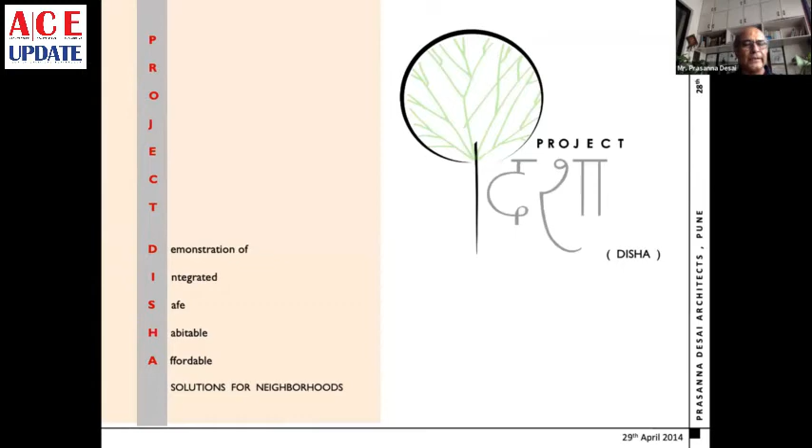Having said that, we run this project called Project Dasha, and Project Dasha to Disha. The Disha is demonstration of integrated, safe, habitable, affordable solutions for the neighborhoods, in which we are saying there's no point in scribbling all the time. We have been into it for the last two decades trying to say, let us show a demonstration. So this is the Dasha of your neighborhood, and this is the Disha, which is a 4-point approach: data collection, design, discuss - now this is very important - discuss, and then demonstrate.

So in a public realm, you have good street lighting, garbage management, trees, walking, cycling, and public transport - specifically buses and maybe smaller modes, not the big ones which are very cost consuming, like metro and all. Handicap friendly streets, vendors and kattas, and open spaces.

If we do this, it's very simple: property value will go up, safety will go up, health will go up, social interaction will go up, fuel pollution will go down, and fuel consumption will go down. And this will lead to the creation of healthy, hygienic, and habitable neighborhoods.

And the 11 number bus is our pet - it means walk and cycle, but both have to be safe cycling and safe walking. That is the prime criteria, because I will not cycle if I don't have safety. My elder son went to school on a bicycle, but the younger one did not go to school on a bicycle because the road was widened, the speed of vehicles increased, and it became risky in terms of meeting with accidents. So this is a component of a street as a public space.

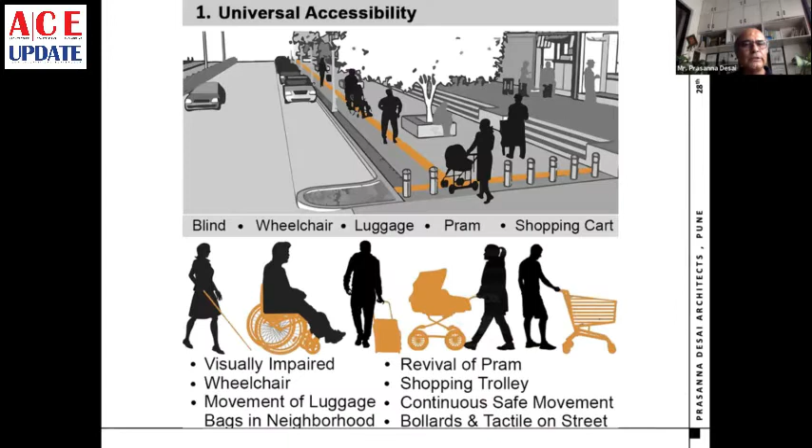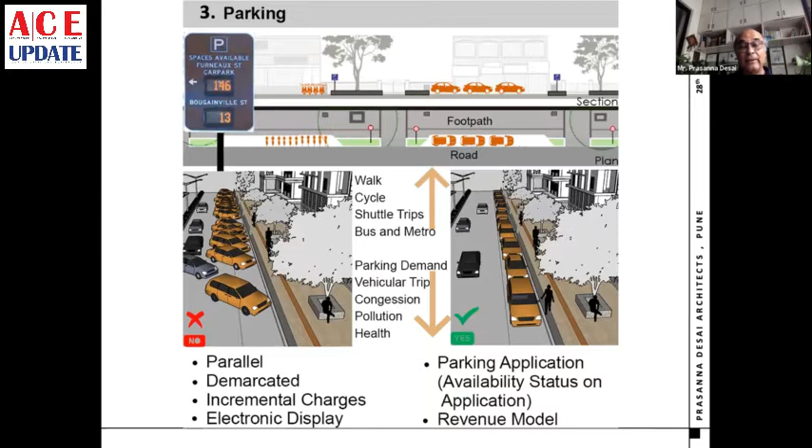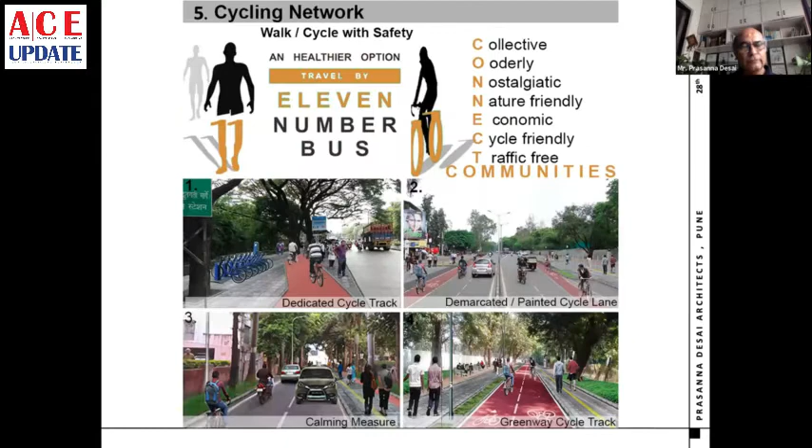The green is what we should have, the desired one, and the red is what we are currently doing. Having said that, the guiding principles for the public realm - we have six principles on which we work: universal accessibility, walkability, parking, paid parking if possible - which is very rare now and very lowly priced - hawkers and vendor spaces, which are also as per the Hawkers Act passed by Parliament, cycle network and walking network called the 11 number bus, and a neighborhood shuttle.

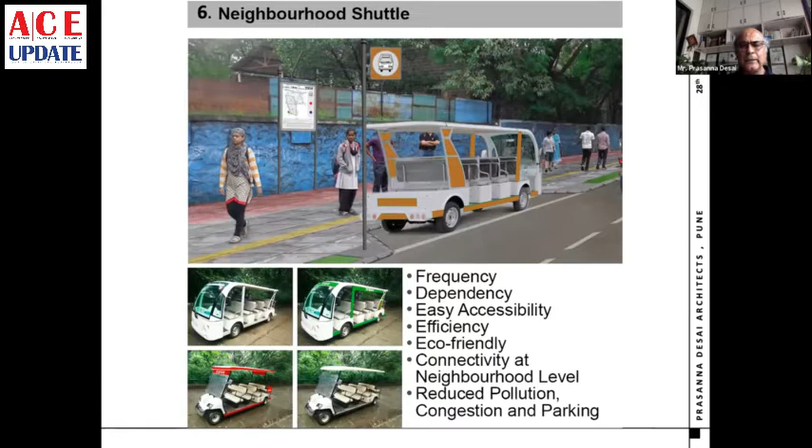So if you can have shuttles within the neighborhood which will take off 1 to 2 kilometers, somebody can just hop on hop off rather than take out cars, and I can maybe pick up 2 or 3 or 4 kilometers and have this hop on hop off within the neighborhood.

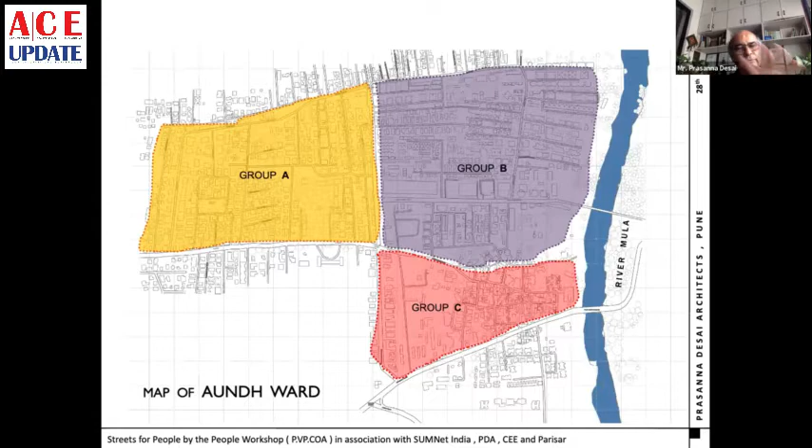The next stage was a workshop called Streets for People by the People, owned by the community. And this is all pre-smart city, because suddenly we talk about smart city as if nothing has been happening in cities for the last two or three decades. I think things have been happening at a smaller scale, but the smart city mission has certainly given impetus to it. Streets for People by the People was a workshop between PVP College of Architecture, where I teach, and SUMNet and NGOs like Parisar, the Center for Environment Education, and Aundh Vikas Mandal. We said that instead of one street, we will move to the larger neighborhood.

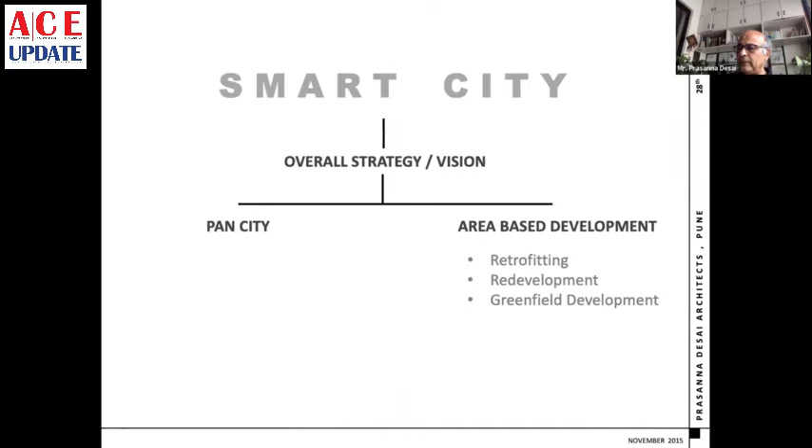Then we had three components: retrofit, redevelop, and greenfield. We went into the area of Aundh, where we said we will redo the street and the neighborhood with people, policy, and participation. There is a platform of Aundh, the smart city, and the last one is patience - you need patience for it.

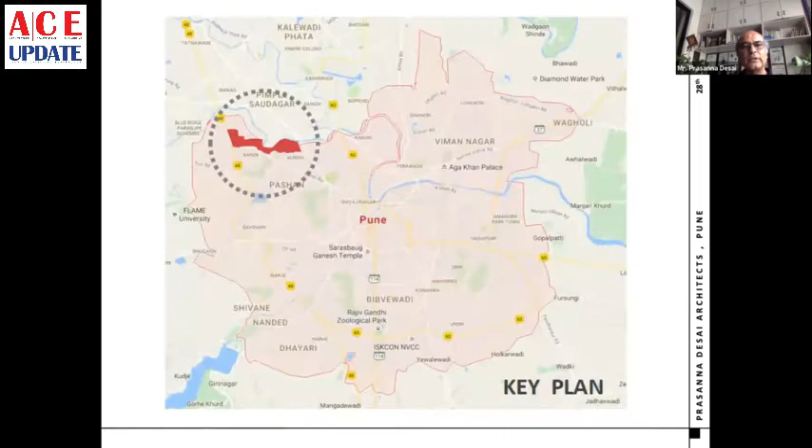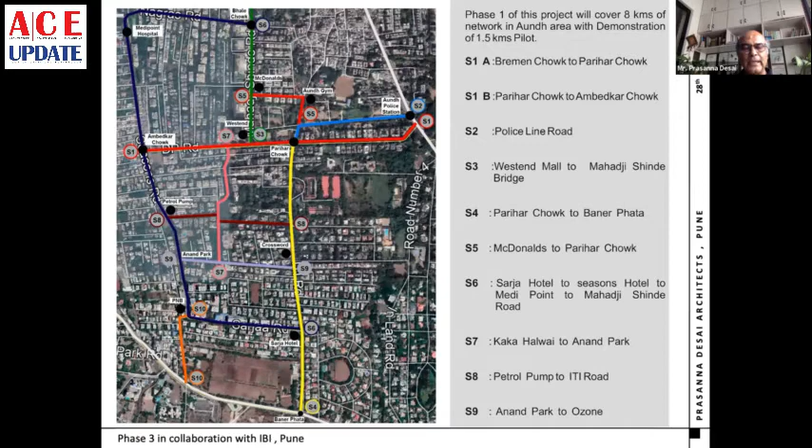This was the key plan, and we identified nine streets. These are the nine streets, and the red streets you see, the horizontal one on top, this is one - so this was S1 to S9, and I will quickly go through this.

These are the public discussions - the whole process I can't show, but there were large public discussions. We believe in people's participation. Before execution, the drawings were put up and people came in, and we had a lot of deliberations. Some people said good, some said bad, there were big arguments, but finally it came through. These are the discussions with the honorable MLA.

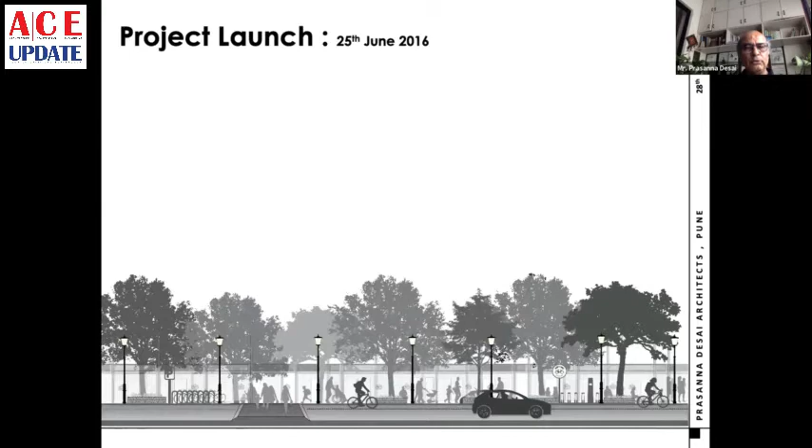The project was launched on 25th June 2016, on the first anniversary of the smart city mission. We made a model of the street. It was launched by the honorable Prime Minister. Then we had a trial run, with more public discussions and meetings there.

We called this 'healthy Aundh, ata aple angan' - a healthy Aundh, now your courtyard. We had this framework: health, habits, ecology, amenities, lifestyle, technology, heritage, and you - 'you' is very important, shown in red, because people are important. This is the way we closed one street, to see the response of the people over 7 days.

This was the response we got from the people. But finally, when we implemented it, we did not close the whole street - this is like happy streets, 24 by 7, for 7 days. Now we have happy streets like Raahgiri in Delhi, normally on Sunday mornings, but maybe time will come when slowly and steadily we move to this. It is just the beginning.

So wheelchairs came back, senior citizens came back - you can see the atmosphere - and cycles came back too. Then we had public discussions for implementation, and finally came to a conclusion on how to implement. These were the 18 elements we implemented, from raised pedestrian crossings and medians to bus stops and signage.

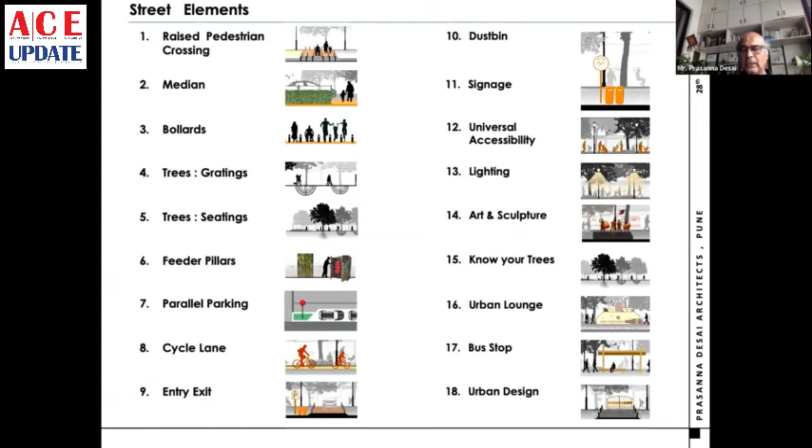I will simply show you not the process but the executed photographs. The street ambience is like this - we saved each and every tree, and created stone seating around the trees where trees can breathe and people can walk freely. All this front space you see is actually taken from the front setbacks of the shopkeepers.

So shopkeepers gave that space - there was a lot of persuasion with them, explaining that if they give this space, people will be able to access their shops directly and they will have more business. So we call it the Aundh Mall below the tree canopy - a mall which is a pedestrian space below the tree canopy. There are some 60 to 70 species and 120 trees, all saved, and this is the ambience today. This is the before and after, which will give you a clearer picture.

We didn't do anything. We only took the frontage of the shops and created the footpath at one level so that people can walk. We used the Universal Accessibility Act so the wheelchair, tricycle, pram and bags can go there now. This is the atmosphere, and we are trying to complete 8 kilometers of this in this street.

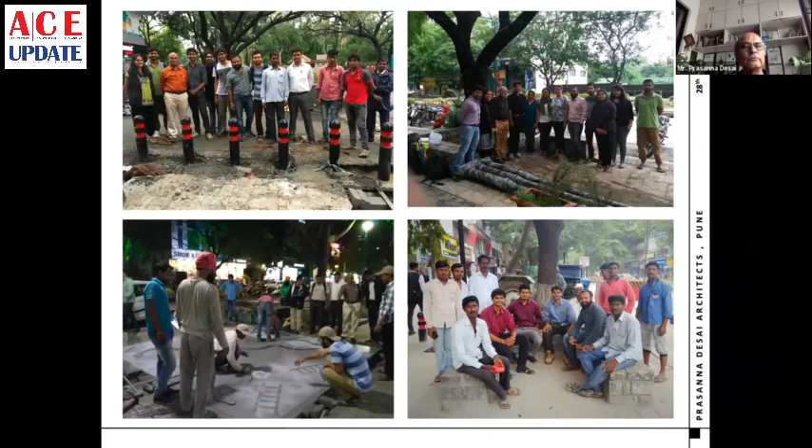The stone seating is a simple, good old mechanism. There was a lot of if and but over the stone seating, but now it is all well accepted. You can see this boundary wall in front of Siaram, and this is what it is now. This is when Honorable Kunal Kumar and Mr. Durga Shankar Mishra ji, Secretary, Smart City Mission, visited the site with the team. These are the workers, and the engineers and architects from our office working to get this done to the best of its possibilities.

Then phase two of Aundh looks like this now. I will just run through these images. Again, same marking on the street, working drawings that at times work, at times don't. So finally you are on the street marking with the tape, and this is what the ambience currently is, and it is taking shape.

I must also say that this is all work done by government contractors. I'm extremely proud that Sarkar can do it - it is government engineers, PMC engineers, PMC contractor, L1 tender. So who says that Sarkar cannot do it? Sarkar can do it, and Sarkar is demonstrating it. I'm a big supporter that the government should venture into more and more projects like this.

These are the junk sculptures which were put by Pune Biennale Foundation. This is what I say, that healthy, hygienic neighborhoods can only happen when we start designing beyond the boundary with a people participatory approach. Unfortunately all of us, including myself and as architects, we stay within the boundary. We don't want to move outside it. And outside the boundary is extremely tough, because everybody is a client and everybody is a designer.

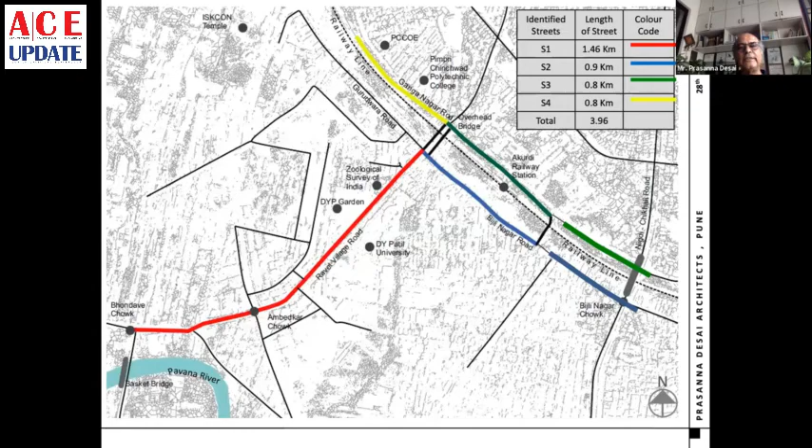These are PCMC streets, Pimpri Chinchwad Municipal Corporation, just to expand further that it is not only a PMC neighborhood. These are again a network of 4 streets - you can see yellow, green, red, and blue street. This is how these streets emerged, you can see the finishing there. Again, Sarkar - government tender, government contractor, government engineers.

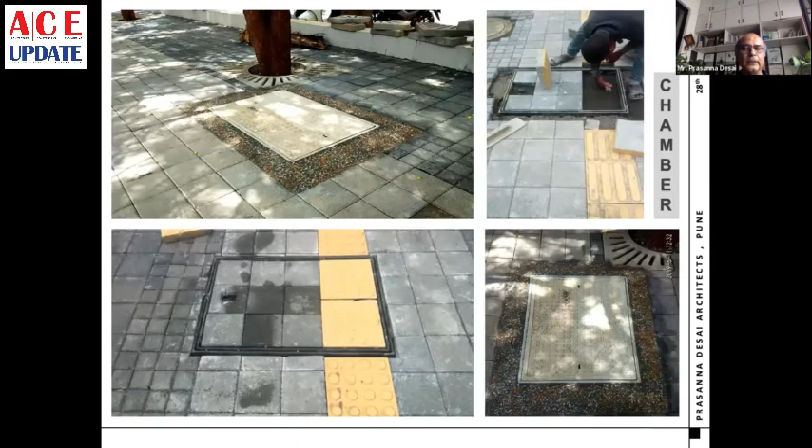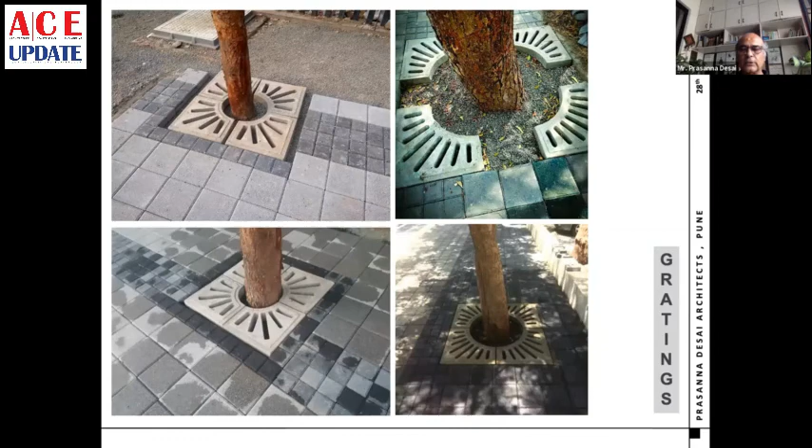This is no less than what we see in Singapore, Amsterdam, Tokyo, and London - look at these grating finishes. It is here in India, so we can do it. I am extremely happy that this opportunity came in. If this system did not support us, this would have remained on the drawing board at our office. So we really say that it is big teamwork.

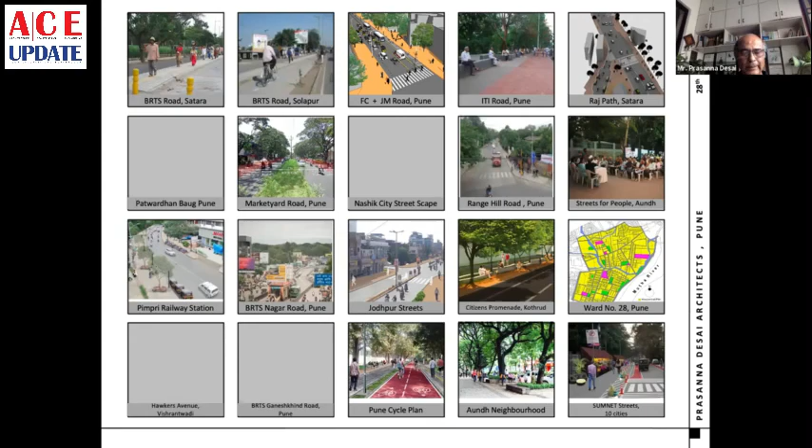These are the kind of projects we are doing, right from the BRTS days - BRTS is a very maligned project, we can talk about it some other time, but it is the most economical project for a city because it doesn't cost hundreds or thousands of crores. And all this, we are doing the Pune bicycle plan, which is not implemented but passed. We are doing the last mile connectivity for the metro in Pune for almost 6 stations, and the journey goes on.

This is my statement, which is quite old now, 10, 12 - we are 15 years old - that the depth of democracy is decided by the width of the footpath in a city.